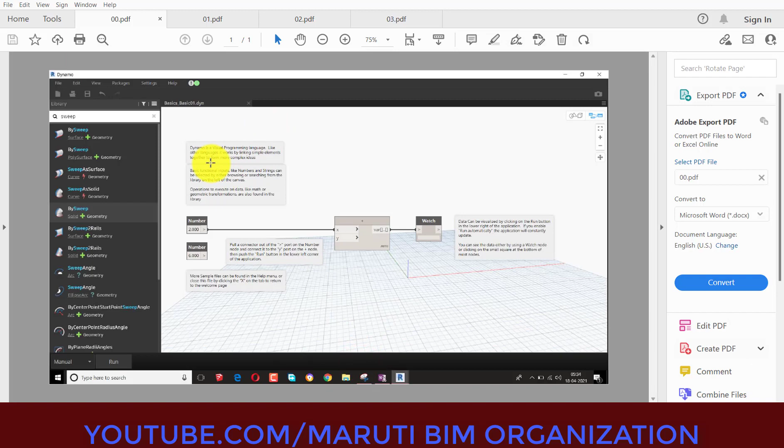For those who are very new to Dynamo, let me give an introduction. Dynamo is a visual programming language. Like other languages, it works by linking simple elements together to form more complex ideas.

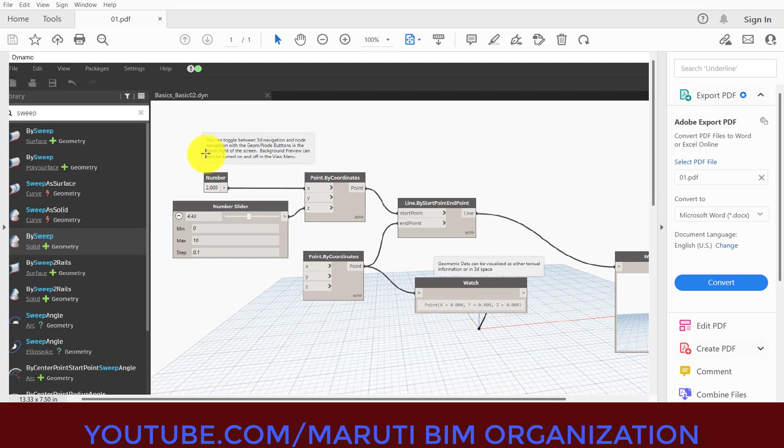अभी मैं आपको कुछ एग्जाम्पल के थ्रू Dynamo का हम कैसे यूज कर सकते हैं उसका ओवरव्यू देना चाहूंगा। सो हियर विथ आई हैव वन फाइल। फर्स्टली लेट्स से मुझे 3D में एक लाइन ड्रॉ करनी है, and that line should vary as per the input. So if I change the input, my location of the line, that is starting point and ending point, both should vary. Also I want to check out the coordinate of that line.

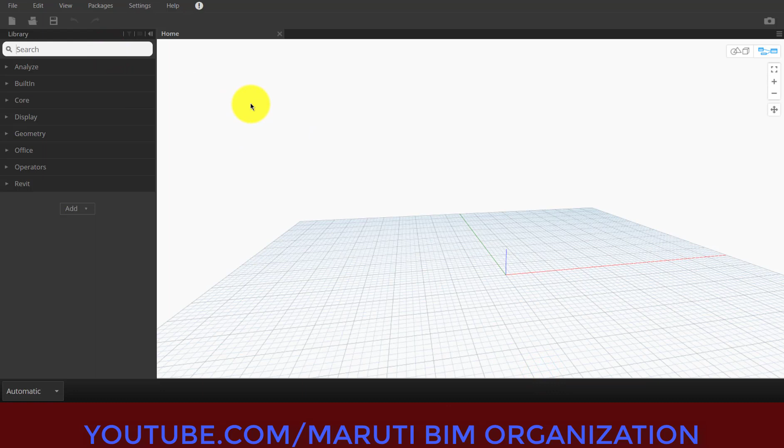तो सबसे पहले हम क्या करेंगे, let's say I go to Dynamo and you can right click on the screen and search for the node, या तो फिर आप यहाँ से भी उसको सर्च करवा सकते हो। So let's say first I will search for the node number, that is number।

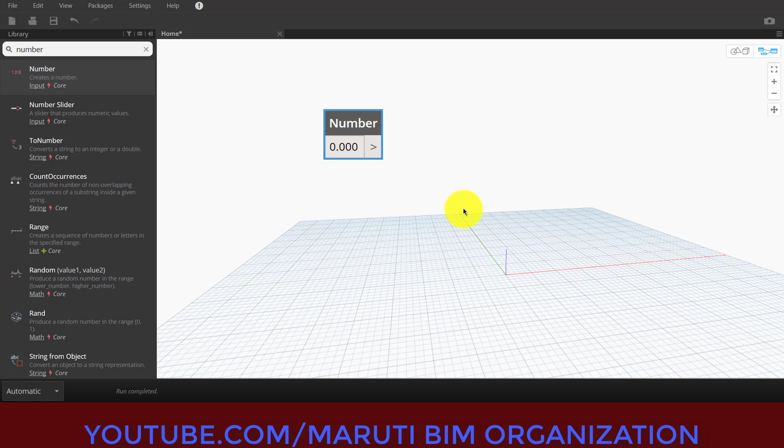अभी आप देख रहे हो कि मैं जूम इन जूम आउट कर रहा हूँ, तो मेरी जो स्क्रिप्ट है, ग्राफ है, वो जूम इन जूम आउट हो रहा है। If I click on enable 3D preview background, that is by Control B, now my 3D background is zoom in zoom out. Again Control B, graph is zoom in zoom out. Again Control B, 3D background is zoom in zoom out. This is the primary basics thing you need to understand, how to switch between the graph view and 3D background view.

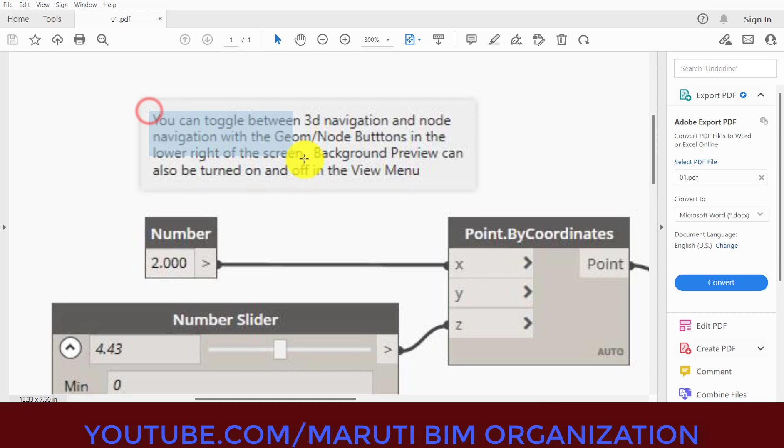Now after giving the number, here you can see you can toggle between 3D navigation and node navigation with the geometry or node buttons in the lower right screen. Background preview can also be turned on or off from the view. So this is one node number that we have placed here.

Now let me type the number, let's say 6. So 6 is the number. This is one way to give the number. Another way to give the number is the number slider.

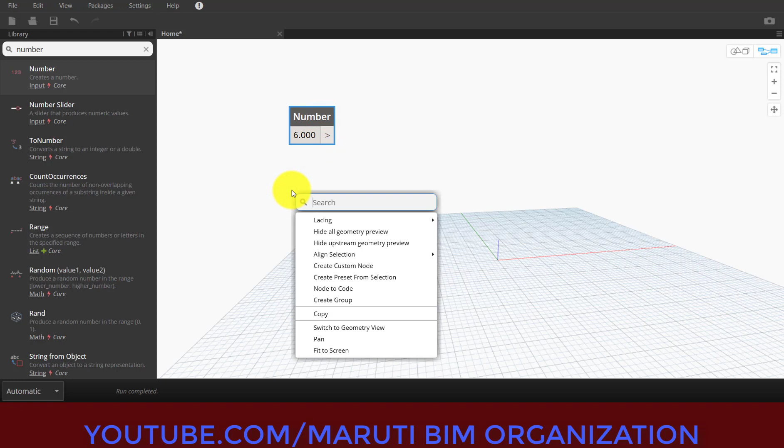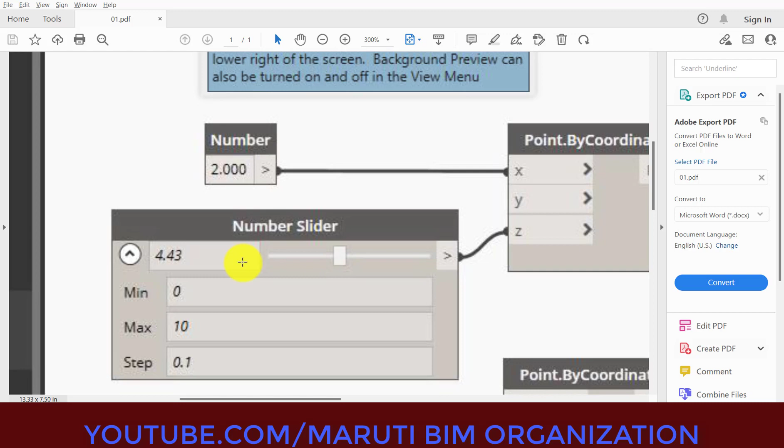In the number slider you have three options: minimum, maximum and step. Minimum से आप उसकी minimum value दे सकते हो, maximum से उसकी maximum, और step यानी कि अगर ये sliding आप करते हो तो कितने इंटरवल पे वो step होना चाहिए। So let's say minimum number is 0, maximum number is 50, and it should slide with the interval of 1.

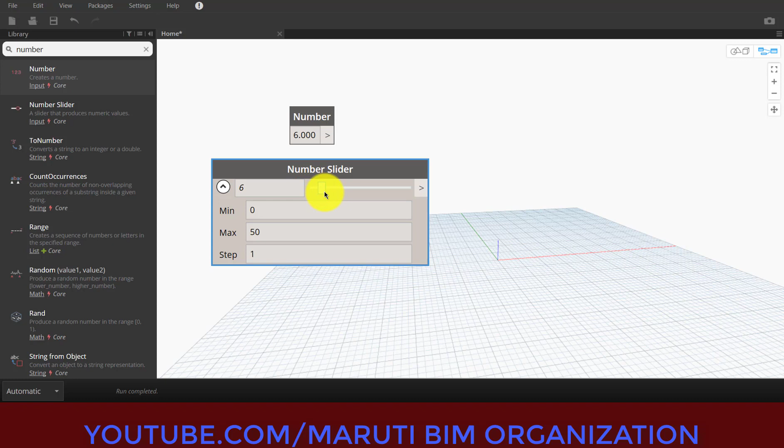So if I'm clicking and dragging, as you can see it changes 7 to 8, 9, 10 and so on. But if I change the interval to 0.5, now it changes in the interval of 0.5, as you can see 25.5, 26, 26.5 and so on. My maximum value is 50, so it will go maximum up to 50. Now this is another way to give the number.

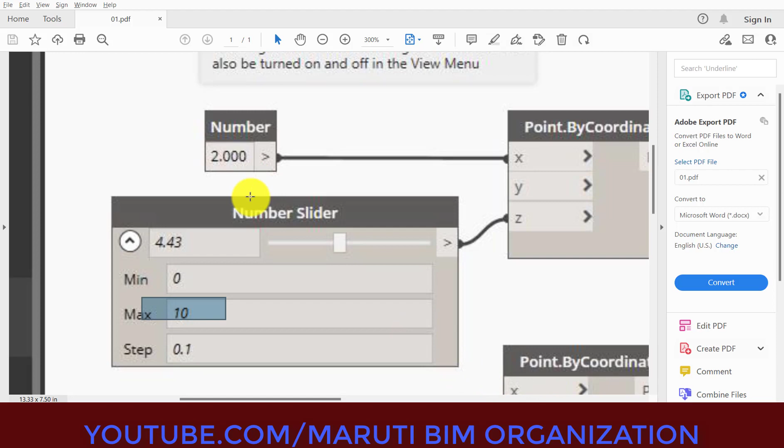If you have a fixed number that cannot be changed, you can give it by this method. If you have a number that you want to be changed, you can give it by this number slider node. As we proceed further in the training, you will come across various nodes. आप जैसे जैसे ट्रेनिंग में आगे बढ़ोगे, आपको पता चल जाएगा कि कैसे डिफरेंट टाइप्स के नोड यूज करके कॉम्प्लेक्स ज्योमेट्री या किसी भी तरीके का आउटपुट जनरेट कर सकते हैं।

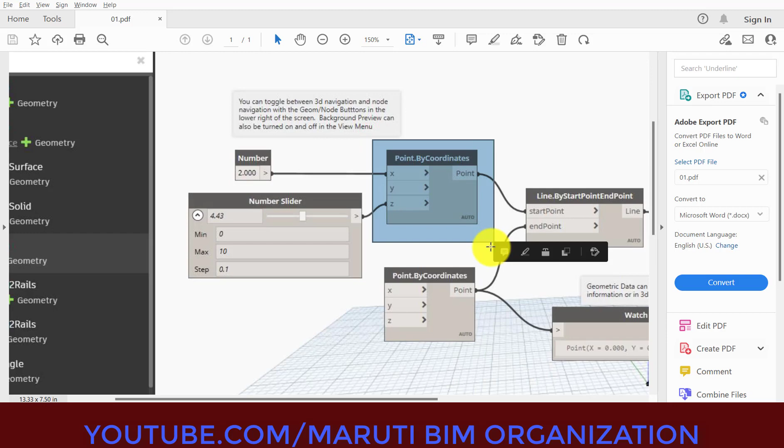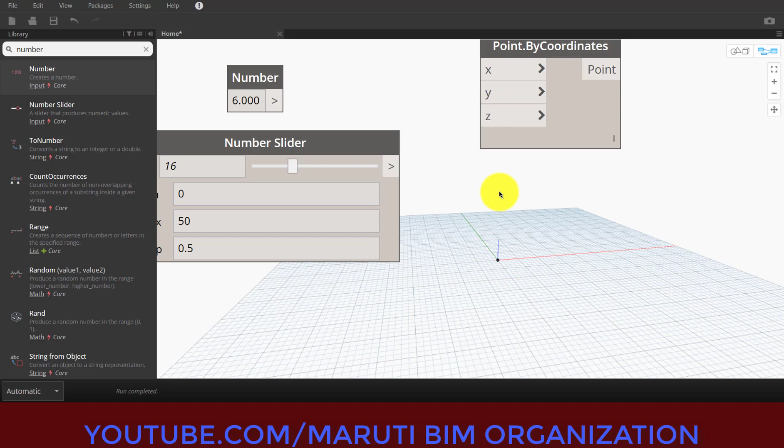Now, if you want to locate the point, there is a node of point by coordinates. I right click here, point by coordinates, and you can simply click and drag x. Let's say my x value is 6, as you can see the point here is shifted to x6. By default y value is 0, and by default z value is 0, and by default x value is also 0. If you are not specifying any x value, by default your point should be 0,0,0.

So let me give x value is this, and z value is this. As you can see, ये जो मेरा point है, that point is now located with the x value and with the z value. So this is how you will be able to change your x and z value of your point.

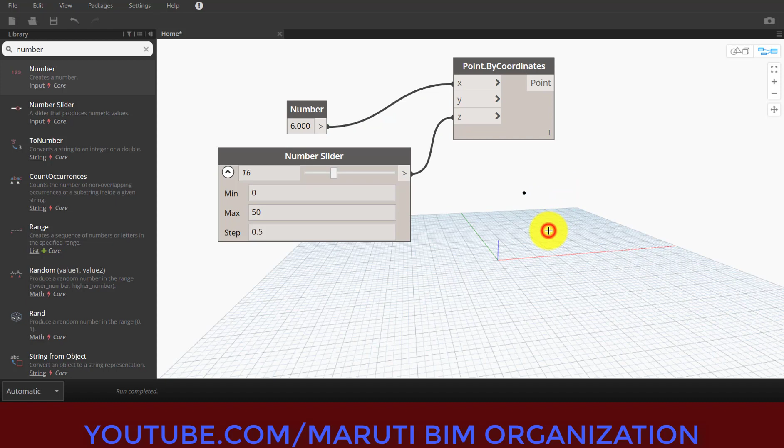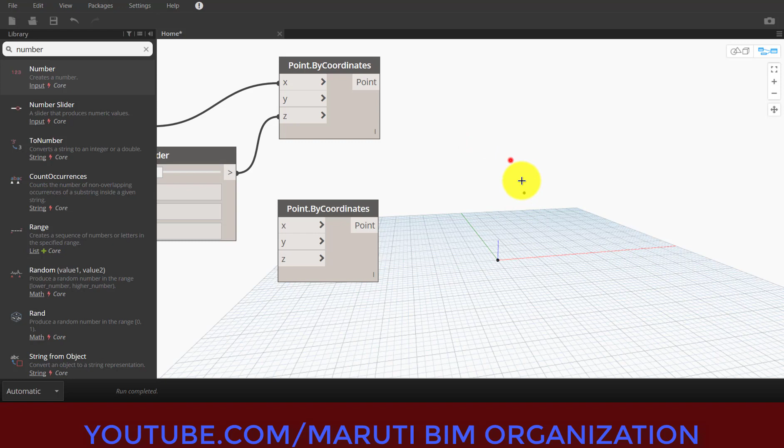Now another point, so right click point by coordinate, which I want to keep as it is with 0,0,0. So x value is default 0, y value is default 0 and z value is also default 0. तो अभी मेरे पास आप देख सकते हो कि I have 2 points, one point here, another point here. If I'm clicking here, this is my first point, clicking here this one is my second point.

Now I want to draw the line. If I want to check the coordinate of this, I can right click here and let's say watch. Watch node is used to see the output.

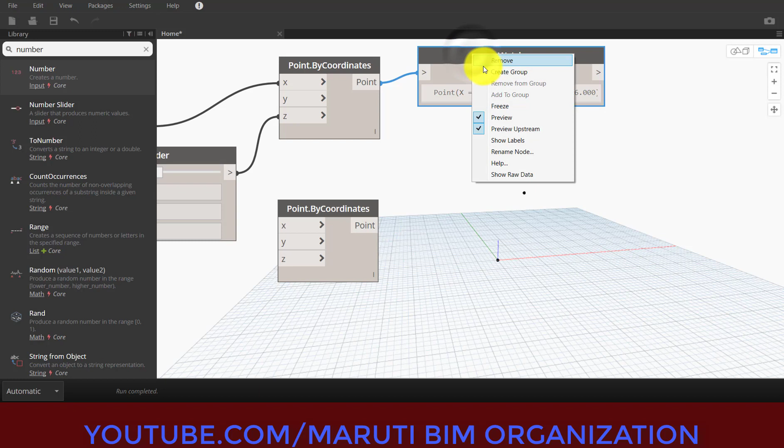And there are two watch nodes: one is 2D and another is 3D. So you can right click and select watch. This is another watch node. This is the coordinate x0, y0, z0, and this is the coordinate x6, y0, z16.

As you change here, it will automatically change in the background, and it will automatically change in the watch node. So this is the power of Dynamo. If you change the input, the output will be automatically changed.

If your output is not changed, make sure your option should be automatic. Let's say I set it to manual and I changed something, nothing is going to be changed here. Why? Because your run script is set to manual, so you have to click on F5. That is also one purpose why we set it to manual, because if we work in complex geometry, at that time we have to set it to manual. Otherwise, every time you change something, automatically it will change the output and unnecessarily your script will run slow.

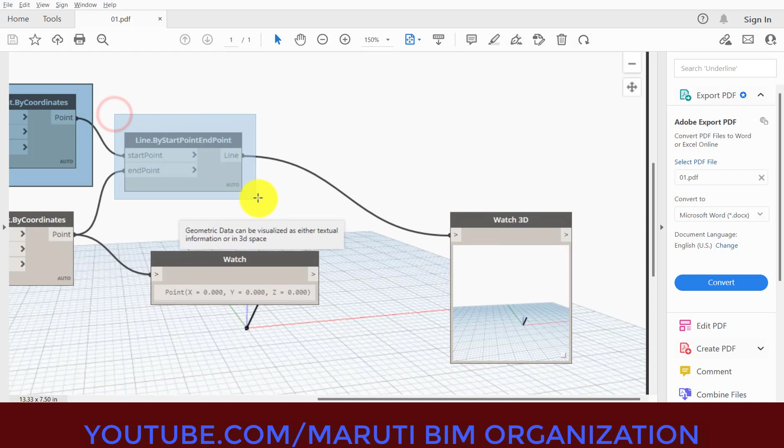Now the next thing is we want to draw a line by specifying a starting point and ending point. So I right click here, line by start point and end point. I specify the start point as this one, and the end point as this one. As you can see, my line is drawn. This is my line, drawn by specifying start point and end point.

Now if I change the input, as you can see, my point is also going to change. My coordinate is also going to change, and my line is also going to change, connecting those two points. And if you want to see this line in 3D, you can use watch 3D.

So right click, watch 3D, and you can drag this line to this watch. As you can see in the 3D view, now here you can also zoom in and zoom out. If you zoom in and zoom out here, it will zoom in and zoom out the graph.

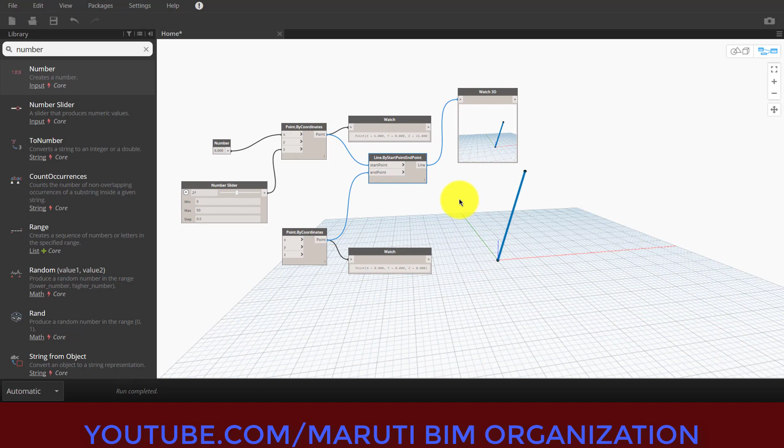Now let us save this script.

So you can save and give the name, and the type of file in which Dynamo saves is .dyn.

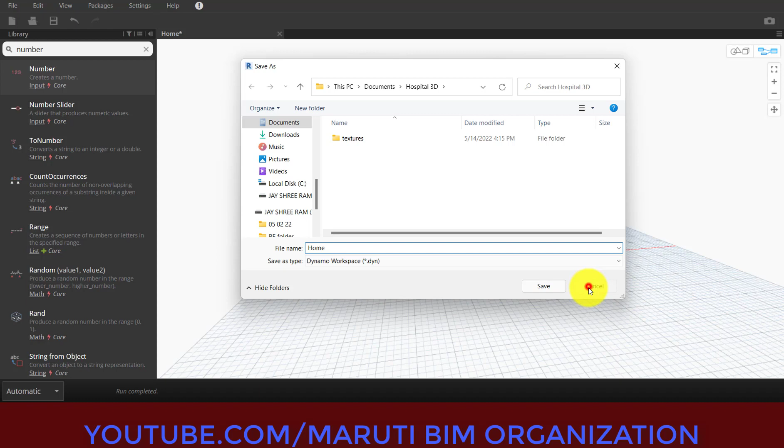Right now I'm not saving, I'm just closing, or you can simply select all the nodes, right click and remove. But I will recommend you just save the script. So let me close this, and I want to create a new script again.

Now let me show you related lists of points.

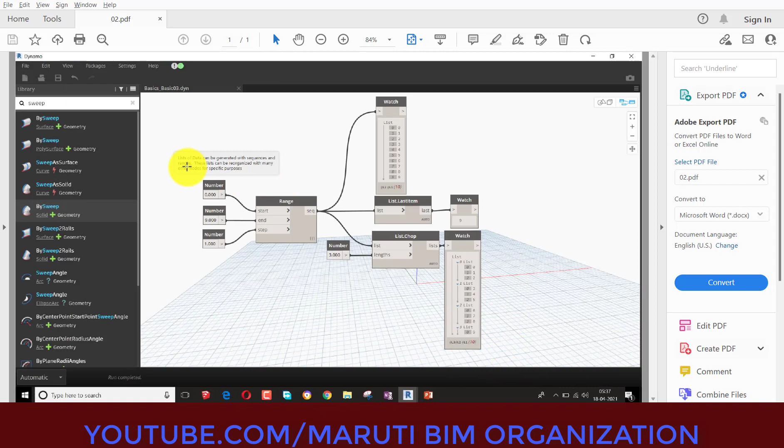As you can see, a list of data can be generated with sequences and ranges. So these are the two things: one is sequence and one is ranges. This list can be reorganized with many other nodes for specific purposes.

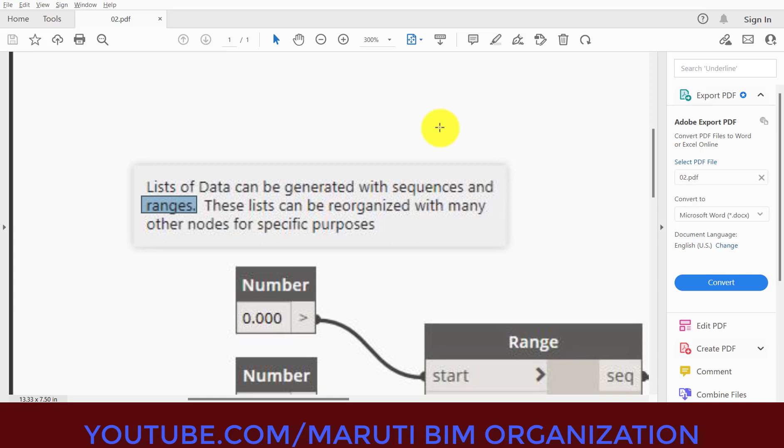So first, let me show you the basic overview of this, and then we will create some complex shapes, using all these nodes to show how we can create a complex shape. I will explain that to you in detail.

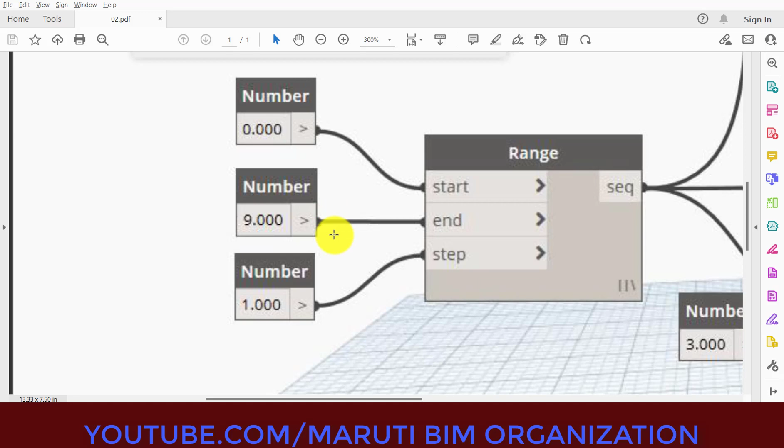So let me give the number. You can give a number or number slider, anything. So I will go to Dynamo, right click and select number.

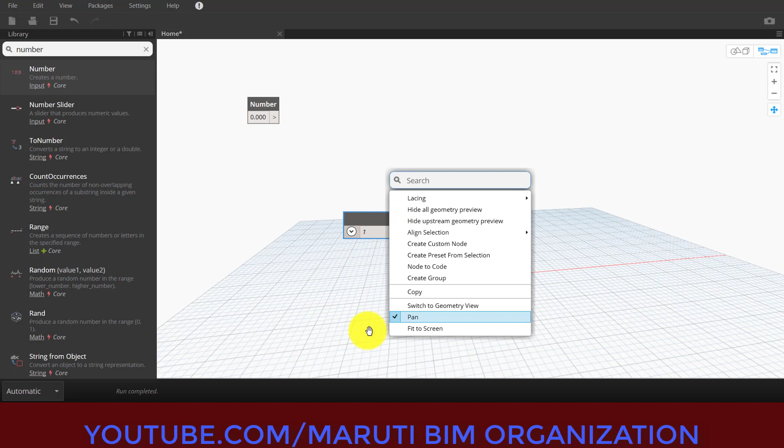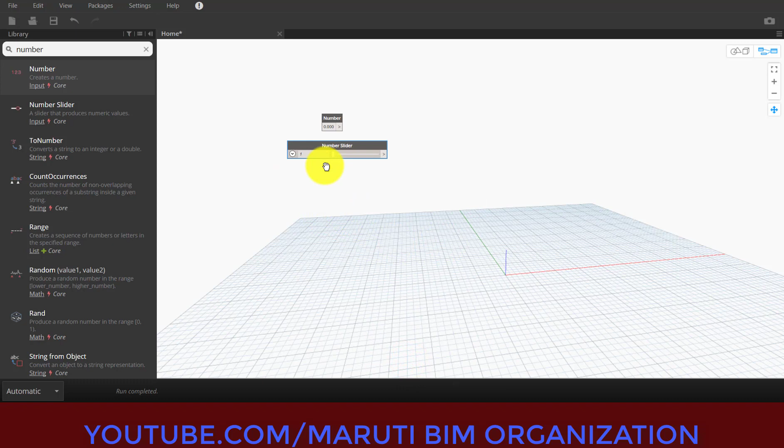Now you can also right click here and change the background, right click and fit to the screen. As you can see, turn off the pan, so you can click and drag. If pan is on, you can always do the pan. So pan you have to turn off, right?

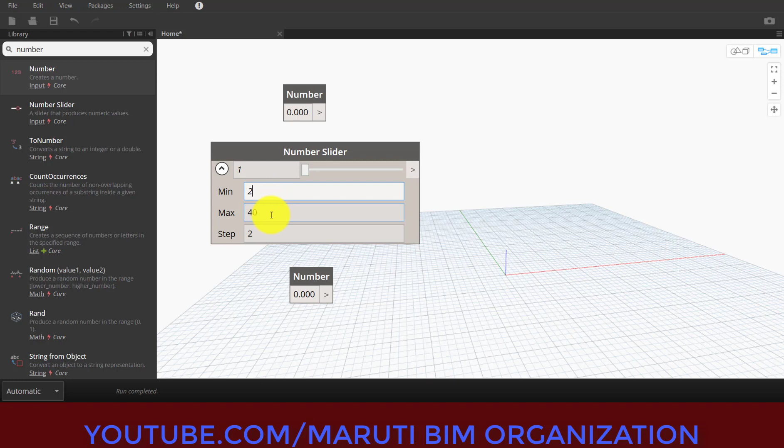Now next thing is again right click and say number. So I have inserted 3 numbers. Let me give the range. Starting from 1, ending at 40, and interval should be around 2. So 1, 3, 5, 7. Okay, let's say starting from 2, interval is 2 and maximum is 40. So 2, 4, 6, 8, like that.

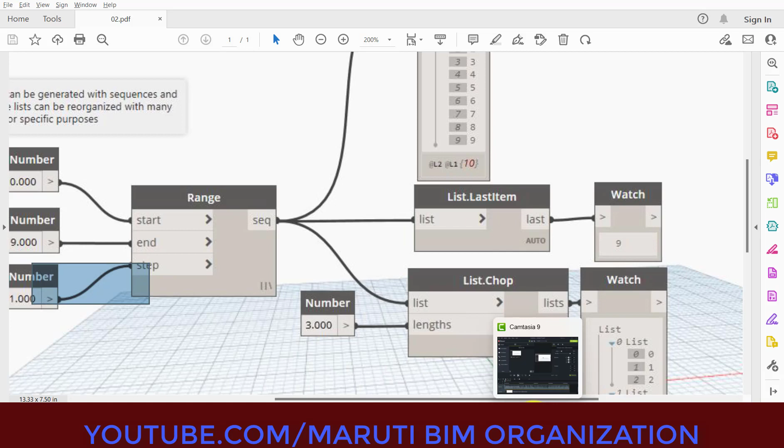Now after that we want to give the range. So our starting range is this one, ending range is this one, and our interval will be this one, right? And we want to find the range, we want to find the numbers, we want to find the output of those numbers. So what you can do, you can go here and then right click and say range.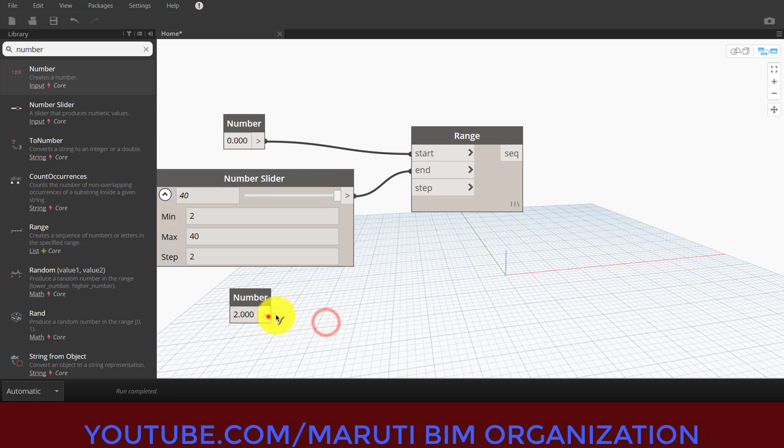Now your starting range is 0, your ending range is, let's say, 40, and your interval is, let's say, 2. So what is the output? If you hover the mouse here and pin this, this is the output: 0, then 0 to 2, 2 to 4, 4 to 6. So these are the list of numbers that you will receive from the output.

Now here you see two things, L1 and L2. L1 is the main list, this is the main list, and L2 is the sub list. Then L3 can also exist. Let's say inside 0 I can also make a list, so that one will be L3. So L1, L2, L3, like that.

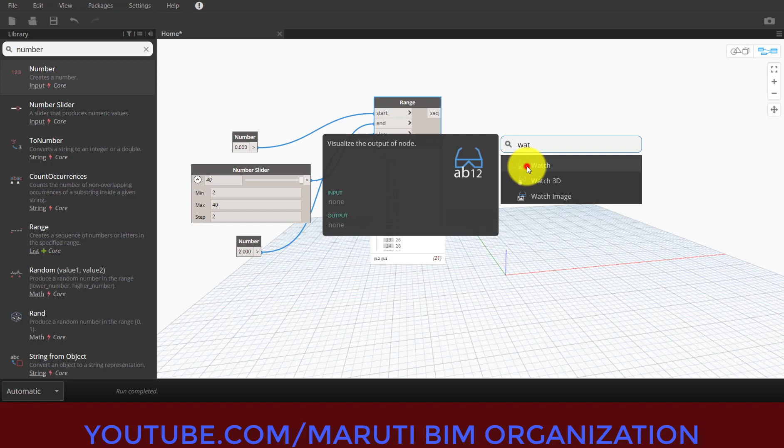Good, next thing is, you can use the watch node so that you can see the property, the output of that node. So let's say watch node, I'm using this sequence here. So you can see 0, 0 to 2, 2 to 4, 4 to 6 and so on. So here I won't need to turn on the output, I can see its output from here itself.

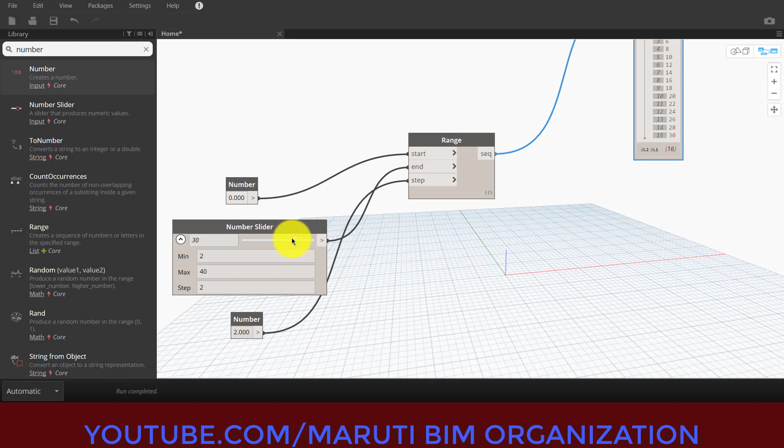If I change the input here, as you can see, number of points are decreasing here as well. Now maximum is 28, so here it is also 28, right? So this is the range node.

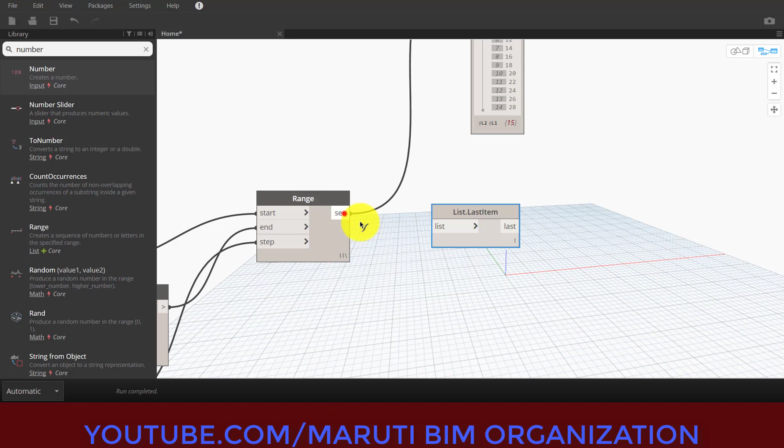Now I need to check the last item of this list. Okay, so list dot last item. Just like in AutoCAD there are different different commands, similarly here there are different different nodes. So right click and list dot last item. Okay, and what is the list? List is this. What is the output? Output is 28 because, as we can see, the last number is 28.

Because sometimes the requirement is like this, that from my list I need to extract the last number, from my list I need to extract the first number, right? So right click, first item, and first item is, let's say, this. So as you can see, my first item is 0, I keep it on top. My first item is 0 and last item is 28, and in between items are this, right?

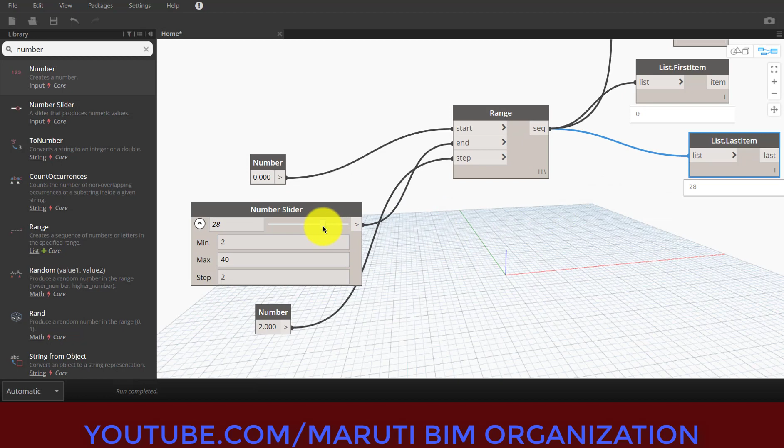So you can also filter your list by specifying what is the first item or what is the last item. Now if you change the input, obviously the input will change. Let's say it is starting from 10. So as you can see, your first item is 10, last item is 34. It is also 10 and 34, right?

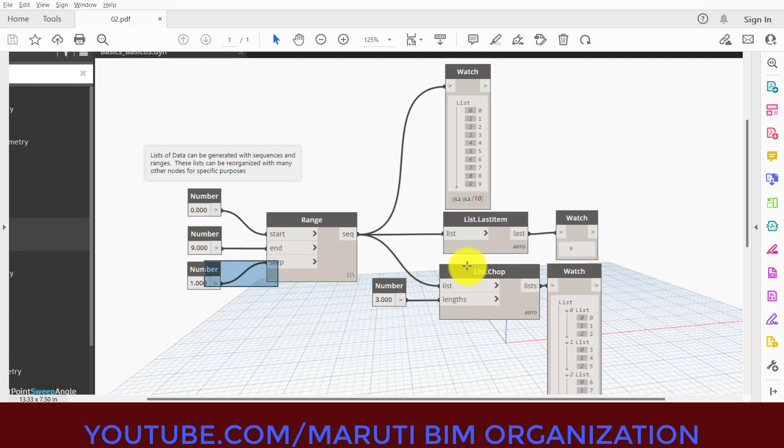Now let us go to list.chop. List.chop means we want to chop this list at the length of three. Now what is that? What is the meaning of that? Let me show you, list.chop. See, list is what? This is the list. And let me see the output, so watch node. Sorry, not watch 3D, but only watch node.

And list. Now what is the length? We want to divide the list into 3. So I can right click and say number, and number is, let's say, 3.

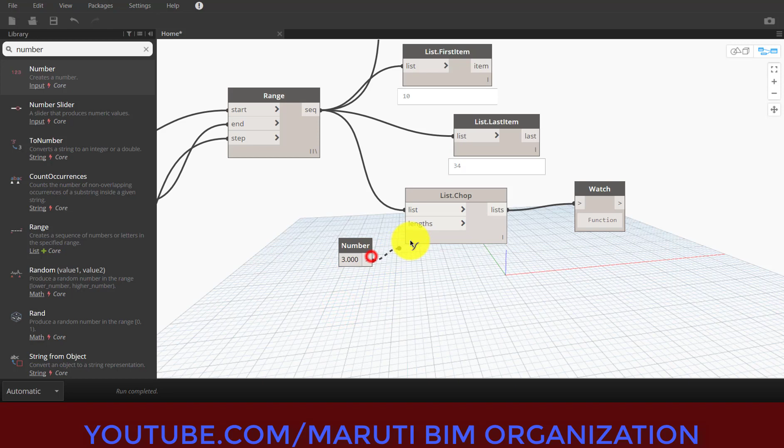Here you see it got divided into 3 parts. So 10, 12, 14 - this is the first list. 10, 12, 14. Then the second list is what? 16, 18, 20 and so on. As you can see, 16, 18 and 20. So look here.

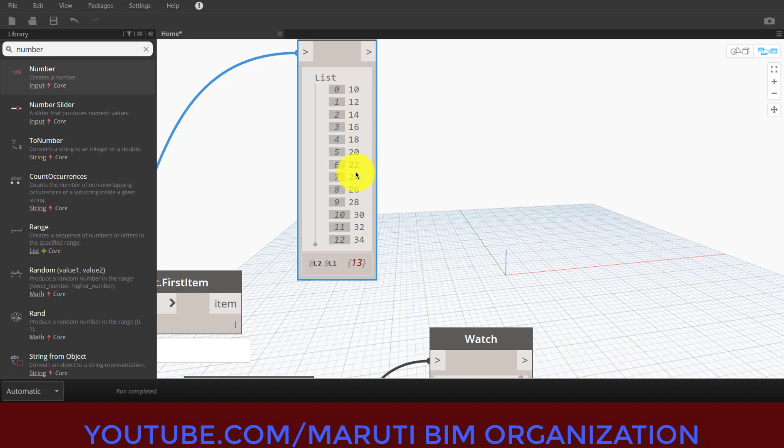See, if you look here, what is the difference between this and this? Here all the list is given in one range - 10, 12, 14, 16, 18, like that. But here the list is given into subcategories.

As you can see, the main list here is L1, and this is also main list L1. The secondary list is L2, that is 10 to 34. Here secondary list is 0, 1, 2, 3 up to 4. And here third list is not there, but here the third list is what? It's a sub list - 10, 12, 14, 16, 18, 20 and so on.

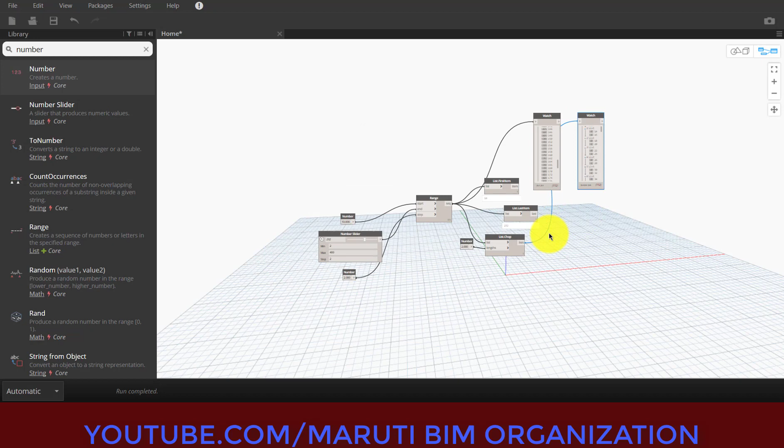So everything is based or reflected as per the input, as you can see, right? So here the maximum number is 400, but right now the number is 232. Maximum number is 400, but right now the number is 232. So let me change it to 400.

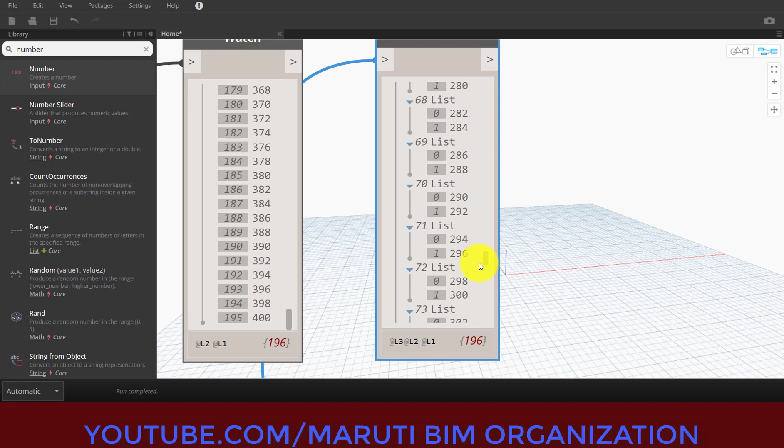Okay, now you can also chop this list, like I want to divide it first into a list of 5, then divide into a list of 2, like that. Okay, so this is the way - let's say here I want to divide first by 10. So as you can see, it got divided into a list of 10, right?

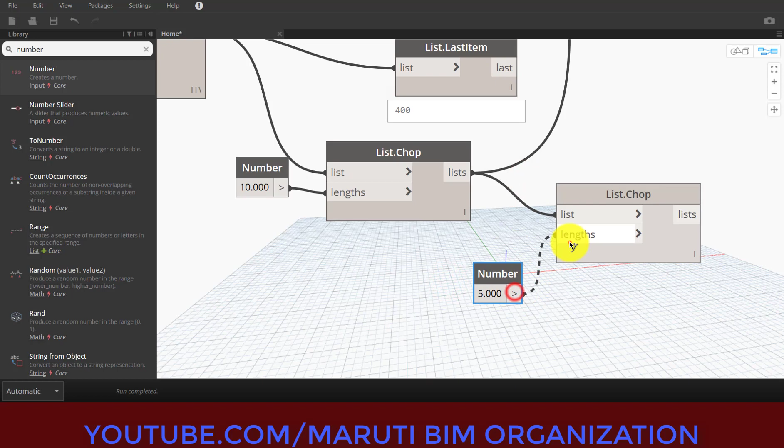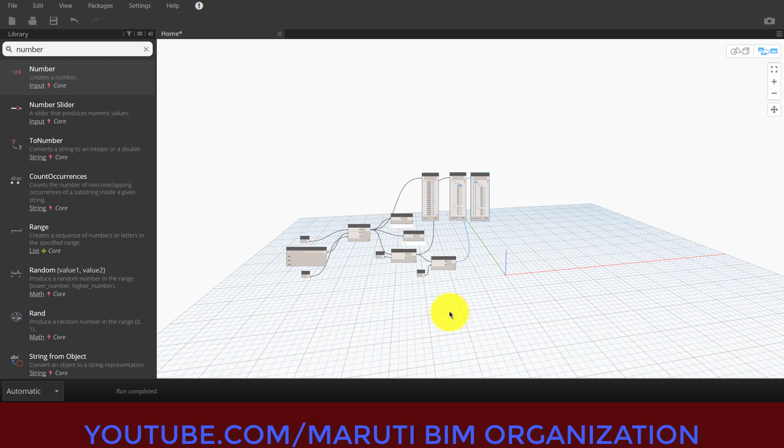So can you see that is a list of list? So here, earlier there were only L1 L2, here L1 L2 L3 came, and here L1 L2 L3 and L4. Why? Because this list is 10, 12, 14, 16, and I also need to divide it, let's say into 5, into a range of 5, or whatever my range is, I need to divide into that, right? So this is how you will be changing the range, right?

So let's say if I want to change to 2, right? So that one will be wow. So right click and say remove, right click and say remove, and right click and say remove. Okay, so this is the way that you can use the range node in Dynamo.